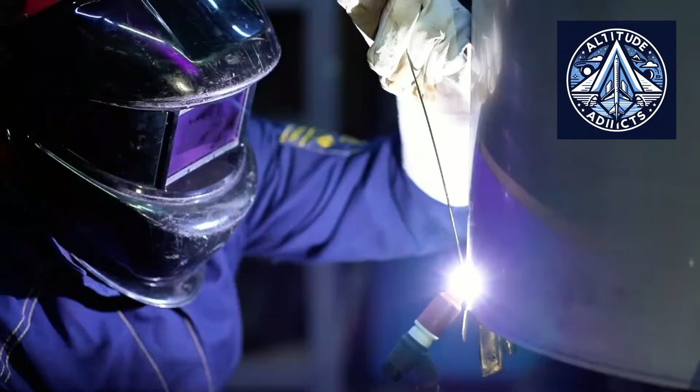What you are looking at is one of the most ambitious civilian maritime initiatives in decades, being prepared by Russia's shipbuilding industry. The United Shipbuilding Corporation, or USC, and the Vimpel Design Bureau have jointly devised the initiative, which is referred to as Platform Number 1.

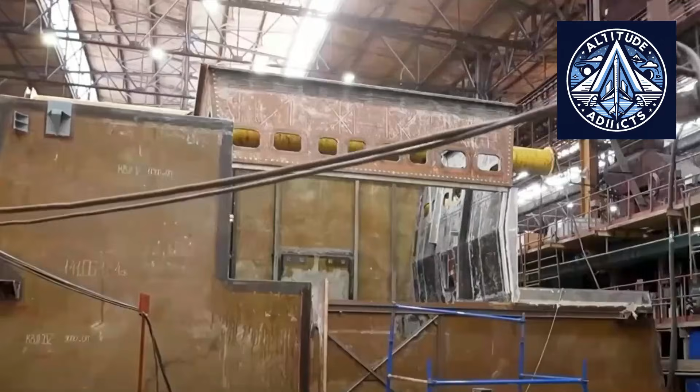The concept introduces a highly standardized platform from which multiple types of commercial ships can be produced using common hull sections, common equipment, and common production procedures, rather than designing and building each vessel as a largely unique project. The objective is to establish an actual serial production model for Russian commercial shipping, a phenomenon that is exceedingly uncommon within modern shipbuilding.

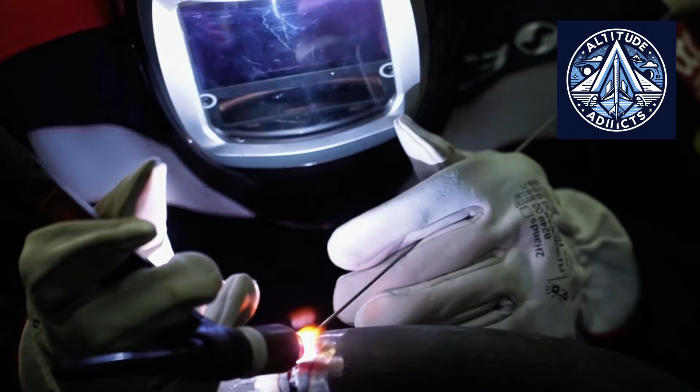And in this video, we're going to dive into how this massive shift works, why it is happening now, and the massive hurdles it faces.

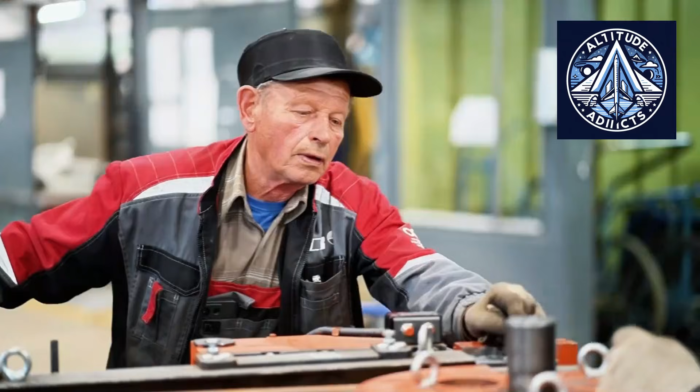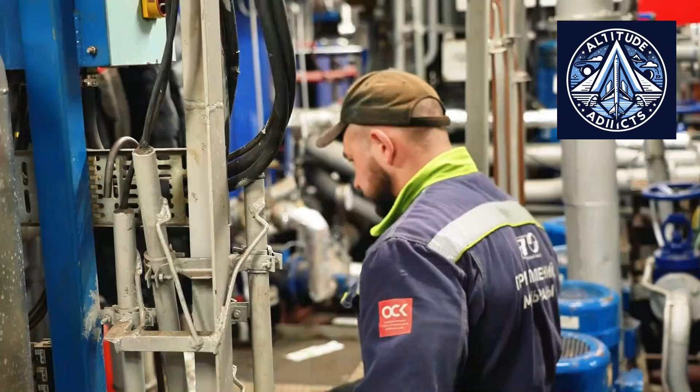This whole program will initially be focused on the Krasnoye Sormovo shipyard in Nizhny Novgorod, which is currently undergoing an extensive upgrade initiative. By 2031, USC intends to build 85 vessels on the platform, while simultaneously increasing the annual production from 6 ships to approximately 20. The initial vessels are anticipated to commence production in the latter part of this decade.

The platform is designed for universal dry cargo ships, container vessels, and tankers that operate in the significant river-sea transport sector of Russia. To understand why this is such a radical shift, we have to look at how shipbuilding has historically been differentiated from the production of automobiles or aircraft.

Many customer-specific modifications are often present on vessels that are of the same class. Machinery configurations, compartments, accommodation areas, and cargo arrangements are usually redesigned by shipyards. This adaptability is advantageous to ship owners. However, it often results in increased expenses and extended construction timelines.

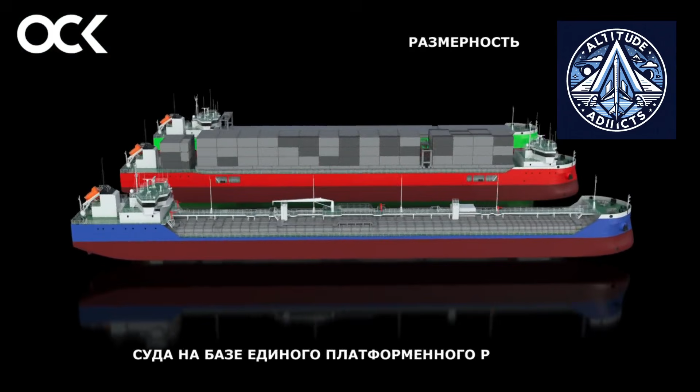Now, let's step back for a second and look at the big picture. Platform Number 1 attempts to challenge this traditional approach by treating ships more like industrial products made from standardized modules. The concept divides each vessel into 6 main hull blocks. Communication systems, bow thrusters, and anchoring equipment are pre-installed in the bow section of all ship types.

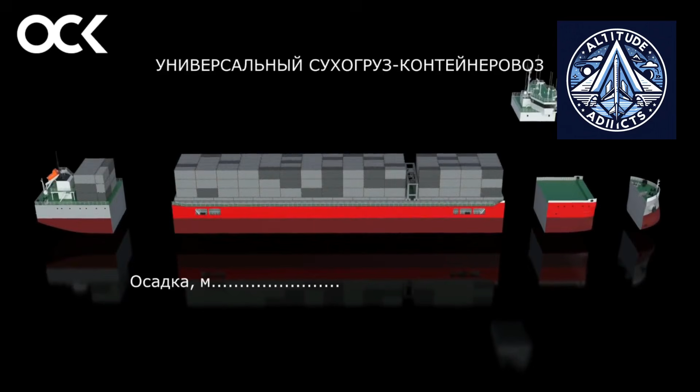The bow is connected to the main superstructure by a transition block, which is customized to suit the vessel's classification as a tanker, dry cargo carrier, or container ship. The stern section is extensively standardized, while the cargo zone itself is configurable to meet the needs of the customer. The accommodation superstructure, bridge, and service spaces are also consistent throughout the entire family of vessels.

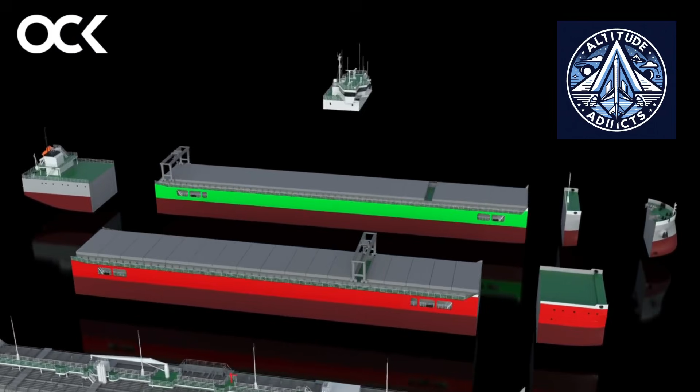In practice, this implies that shipbuilders can produce considerable segments of various vessel types using identical production methods and components before customizing only a limited portion of the ship for specific cargo missions. The outcome is not a singular ship design, but rather a shared architecture that can be used to create multiple types of vessels.

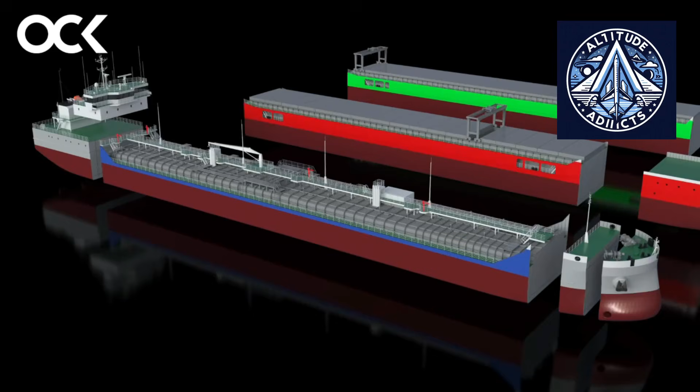This brings us to a critical question that our team at Altitude Addicts has been tracking closely, which is exactly why Russia is pursuing this strategy right now, given that the initiative's timing is not coincidental. The replacement of an aging commercial fleet is becoming an increasingly difficult task for Russia. The economic service lifetimes of hundreds of cargo vessels that operate on inland waterways and river-sea routes are rapidly approaching their end. Many were built decades ago and will necessitate replacement in the years ahead.

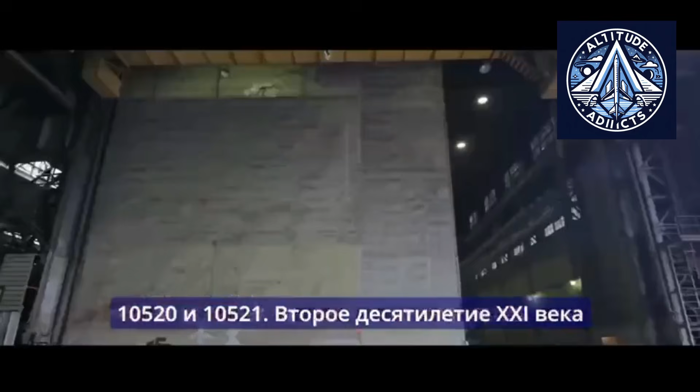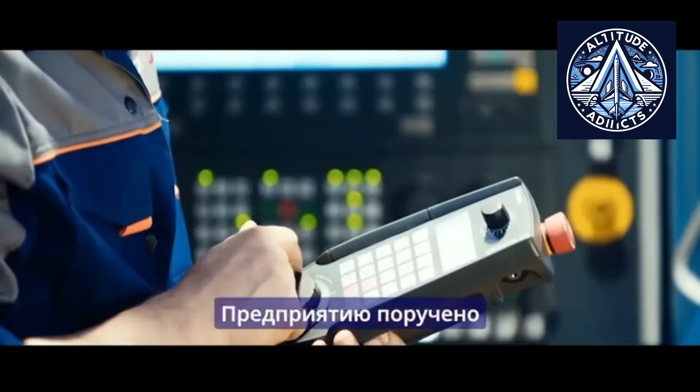Think about it this way. It would be challenging, costly, and time-consuming to replace a large percentage of vessels using conventional shipbuilding techniques. A potential resolution is provided by standardization. Russia aims to create a production system that enables faster ship delivery by consolidating suppliers, simplifying maintenance logistics, and reducing unique parts. It is anticipated that the platform approach will greatly decrease the number of unique components required for each vessel, thereby reducing construction times.

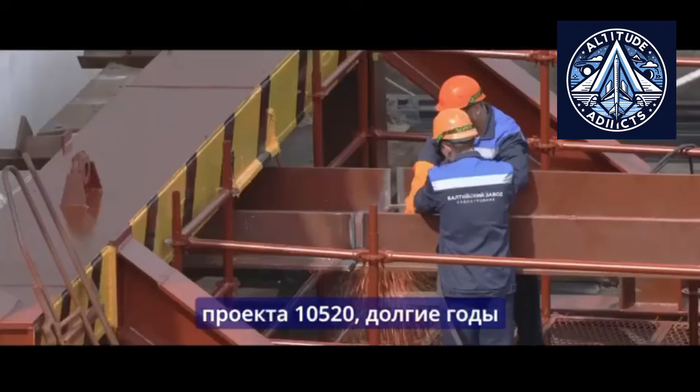This would render shipbuilding more predictable and potentially more cost-effective for operators seeking to modernize their fleets. The initiative is also consistent with the overarching industrial policy objectives of Russia, which include the establishment of stable domestic supply chains and the substitution of imports.

But the real magic happens when we look at how they are standardizing entire systems, going way beyond hull sections, because Platform Number 1 is distinguished by its extensive standardization, which extends far beyond the hull. USC intends to implement uniform propulsion and steering systems for all vessel classes.

Auxiliary diesel generators will also be standardized, with the main difference being in their quantity rather than their design. The majority of the vessel's equipment, onboard systems, and accommodation configurations will adhere to standard specifications.

Let's take a quick breather from all the heavy engineering talk here.

Basically, they want to stop reinventing the wheel every time they build a deck cabin. This method has the potential to generate significant economies of scale. Simplified spare part inventories would be advantageous for ship operators. Maintenance personnel would necessitate instruction on a reduced number of systems.

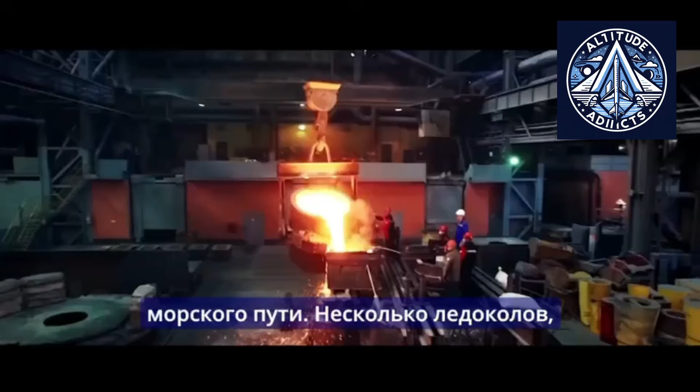Suppliers would benefit from more predictable and extensive production cycles. Rather than adapting to new configurations for each order, shipyards would accumulate experience by repeatedly installing identical equipment bundles. The concept is reminiscent of effective manufacturing practices that have historically led to significant productivity improvements in other industries where standardization has been implemented. This whole setup naturally makes you wonder how it differs from the rest of the world.

At first, modular construction may not appear to be a revolutionary concept. For an extended period, significant shipbuilders in South Korea, China, and Japan have depended on the assembly of large pre-outfitted sections in dry docks. Nevertheless, Russia's strategy is significantly different.

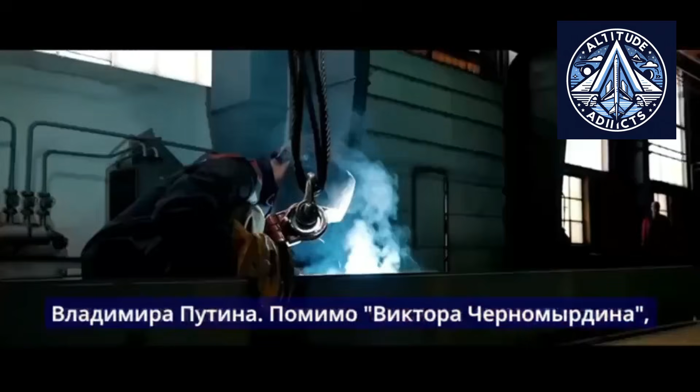The majority of the world's most prominent shipbuilders adhere to standardized production methods, although they keep building vessels with highly specialized designs. Although a Korean shipyard may employ modular construction techniques for LNG carriers, container ships, and tankers, each vessel class remains essentially distinct. Platform number one aims to establish a shared industrial platform that encompasses numerous vessel categories.

To get a clearer picture, the automotive industry may be the most comparable sector for international comparisons. Sedans, SUVs, and crossovers are often built on the same fundamental platform by modern automobile manufacturers. Manufacturers capitalize on shared chassis components, electrical architectures, and production systems, although customers observe distinct vehicles. USC is endeavoring to implement a comparable approach to commercial shipbuilding.

Although modular assembly and digital design tools are becoming more prevalent in shipyards worldwide, there have been few attempts to establish a unified platform that encompasses dry cargo ships, tankers, and container vessels that operate under the same production architecture. This renders the Russian initiative relatively uncommon on a global scale.

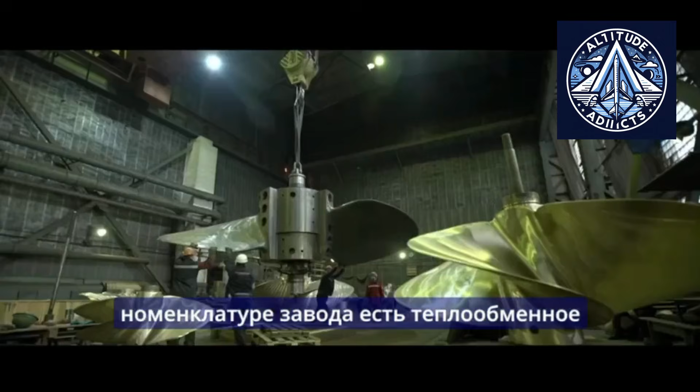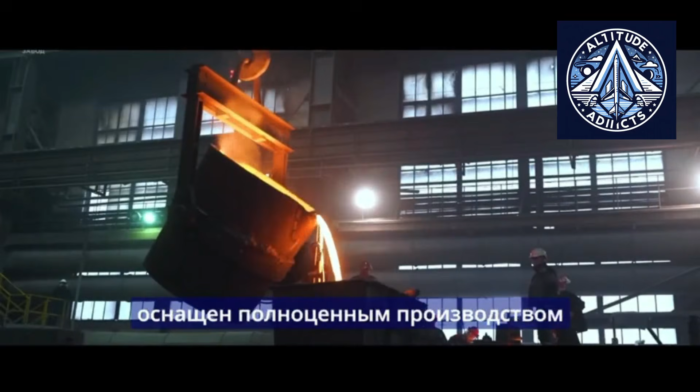Looking closer at these insights from automotive manufacturing, modern car manufacturers have demonstrated the power of platform-based production, which is why the automotive comparison is particularly pertinent. Volkswagen, Toyota, and Hyundai, among others, regularly manufacture numerous vehicle models that are based on shared engineering principles. This method enables manufacturers to more rapidly respond to market demand, reduces development costs, and shortens production cycles. The shipbuilding sector in Russia aspires to attain comparable advantages.

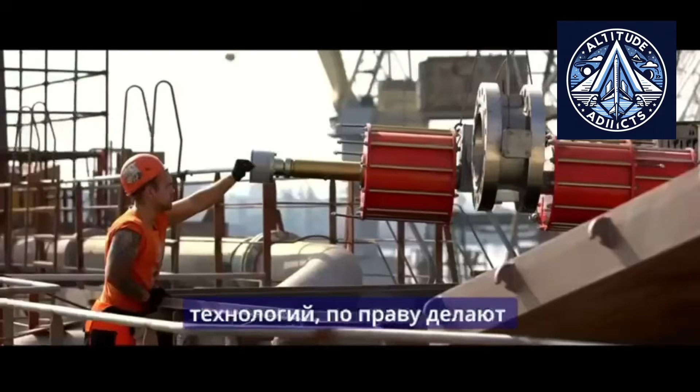If effective, the shipyard could manufacture a tanker, a dry cargo vessel, and a container ship by utilizing a significant number of the same components, production facilities, and supplier networks. A system of this nature would be considerably more efficient than the design and construction of each vessel type as a separate undertaking. Nevertheless, the obstacle is that ships are significantly larger and more customized than automobiles. Consequently, the necessity of accommodating various operational requirements must be reconciled with the advantages of standardization.

All of this grand strategy brings us straight to Krasnoye Sormovo's transformation, because the modernization of the Krasnoye Sormovo shipyard is a critical factor in the success of platform number one. Russia's oldest shipbuilding facility, the historic yard, is currently enduring a significant transformation to facilitate serial production.

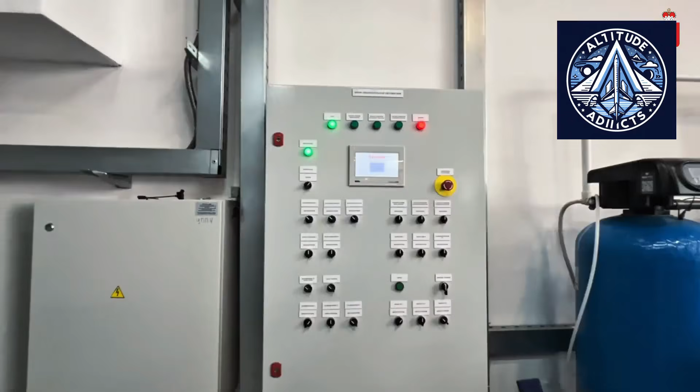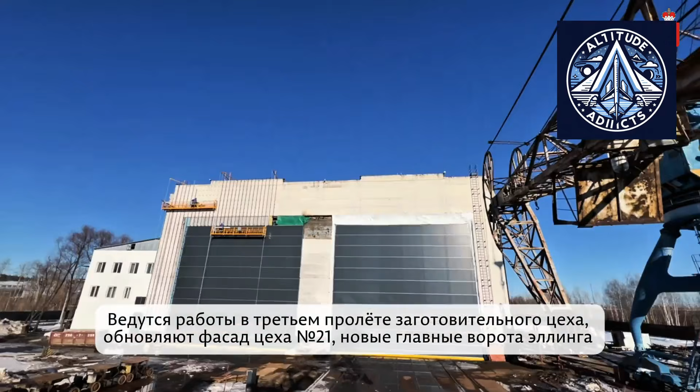Laser cutting systems are replacing antiquated thermal cutting equipment. Robotic welding lines and automated profile cutting devices are currently being implemented. Production management and planning will be digitized through the implementation of new software systems. The yard is also in the process of constructing combined cleaning and painting facilities, procuring self-propelled section transporters, and upgrading the outfitting of quays. The goal is evident: transition from conventional craft-oriented shipbuilding to a production line model.

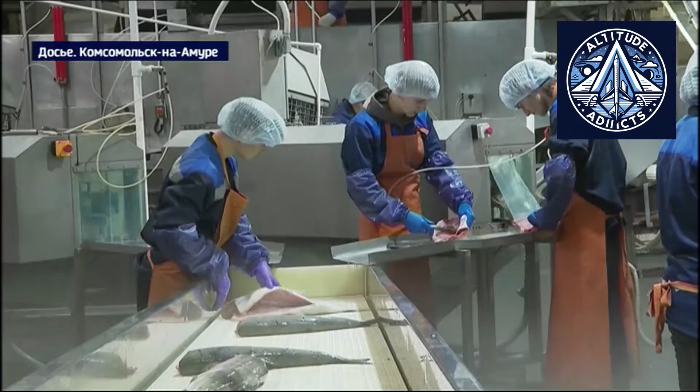The construction time from the beginning of fabrication to launch could be reduced by over 50% if the project is successful. The Russian commercial shipbuilding sector would experience a substantial increase in productivity, as its annual output would more than triple. So updates like this show how the yard is completely changing how it operates.

And it is a point we emphasize often at Altitude Addicts. This transformation is not solely about the acquisition of new machinery. Additionally, it necessitates modifications to supplier coordination, production planning, logistics management, and workforce organization.

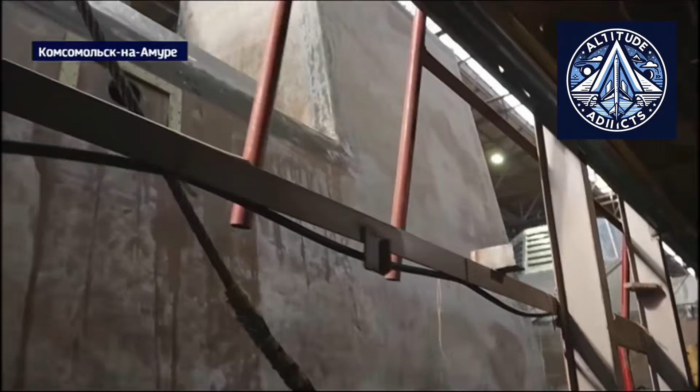The ultimate objective is to create a manufacturing environment in which ships traverse the yard in a consistent and predictable manner. At the same time, we have to consider the environmental factors involved, as another critical component of the activity is its adherence to contemporary environmental regulations. The platform has been developed to satisfy the current standards for emissions reduction and energy efficiency.

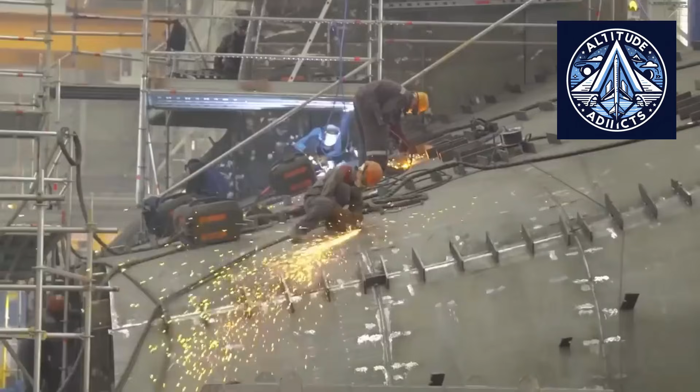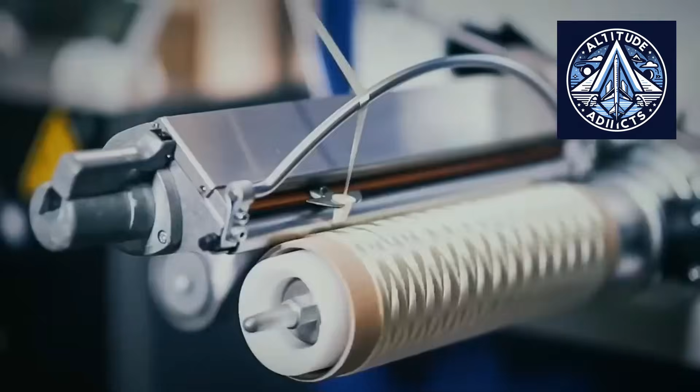Designers have endeavored to enhance fuel efficiency while simultaneously preserving the operational capabilities necessary for Russia's extensive river and coastal transportation network. This is of growing significance due to the fact that environmental performance has become a critical factor in commercial shipping on a global scale. Even operators that operate predominantly on domestic routes must anticipate increased fuel costs and more stringent efficiency standards.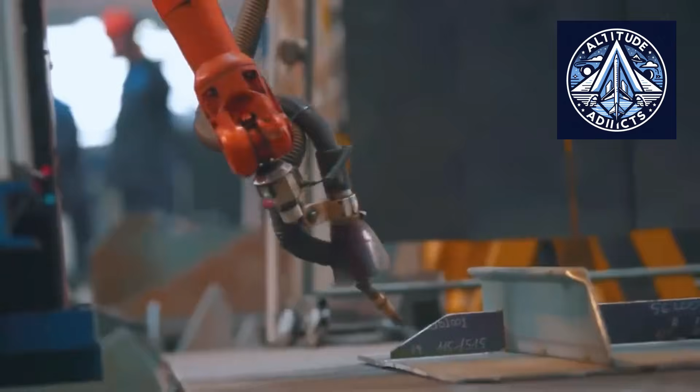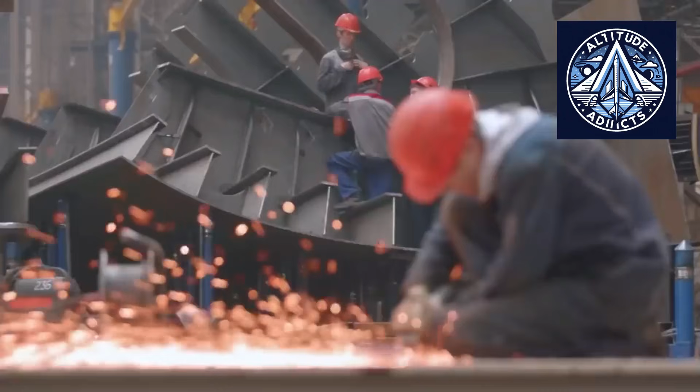USC tries to prevent the necessity for costly redesigns at a later stage in the vessel's service lives by integrating these standards from the outset. The standardized approach may also facilitate future upgrades by enabling operators to introduce new technologies across an entire fleet rather than modifying each ship individually.

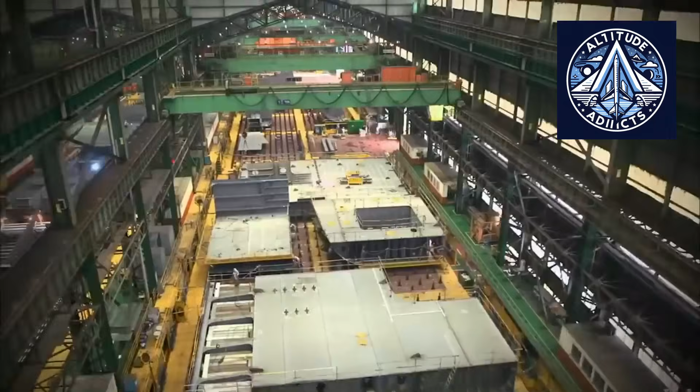Of course, no project of this scale is without its possible obstacles, and the initiative is confronted with sizable obstacles despite its potential. Automobile manufacturing is intrinsically less intricate than shipbuilding. Requirements for cargo are subject to significant variation among customers, regulatory standards are subject to change, and transportation markets can fluctuate rapidly. The platform approach must ensure a balance between using standardized components and allowing for customization. An excessive amount of standardization may restrict its commercial appeal. The program's efficiency advantages may be undermined if the amount is insufficient.

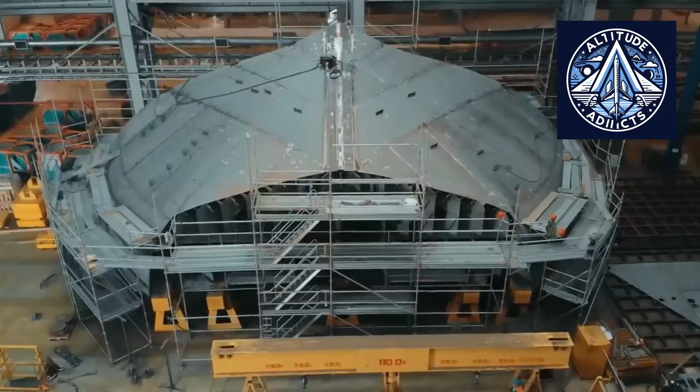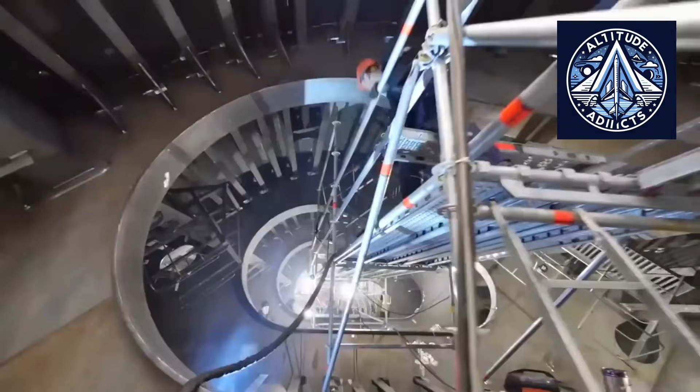The reliability of the supply chain will also be crucial. The strategy is contingent upon the establishment of a dependable network of suppliers that can consistently provide standardized components at a large scale. Additionally, the modernization of Krasnoye Sormovo must be conducted in accordance with the established timeline. The production model's implementation may be impeded by delays in infrastructure enhancements or workforce training.

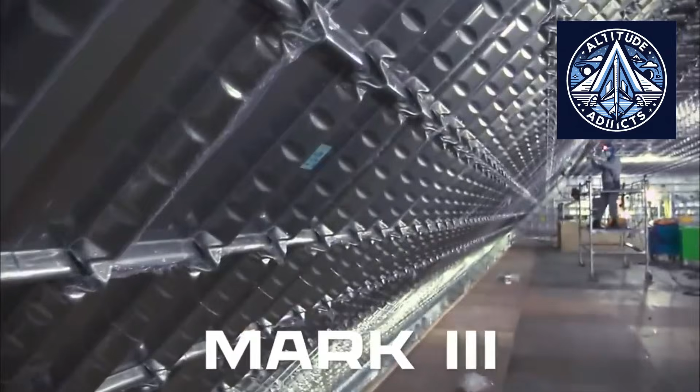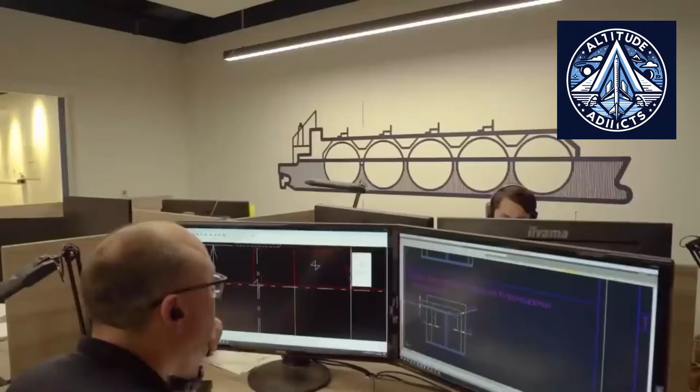Another obstacle is the preservation of competitiveness. International shipbuilders, particularly those in East Asia, maintain their dominance in the commercial ship construction industry by means of their highly efficient industrial systems and extensive production volumes. Russia's platform approach must demonstrate its ability to effectively compete in terms of cost, quality, and delivery schedules.

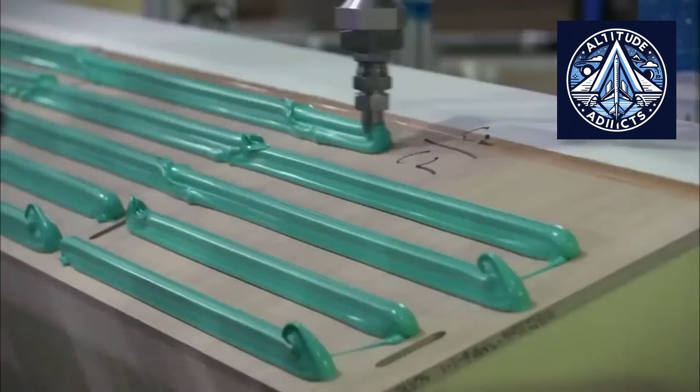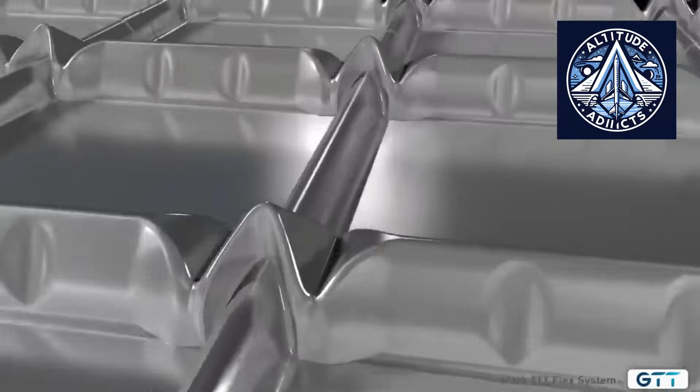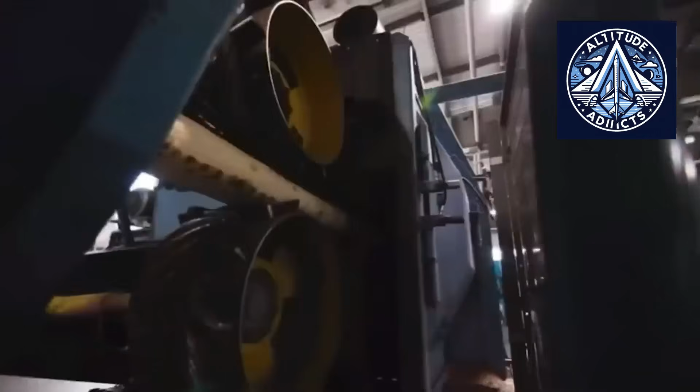When you look at the sheer scale of what they are trying to pull off, it represents a clear return to long-term industrial planning. And the most notable feature of Platform Number 1 is its resemblance to the industrial planning of the Soviet Union. The project's timeline, which spans from 2026 to 2031, is essentially a contemporary 5-year industrial program. Russia's commercial fleet is to be perpetually renewed through the establishment of a comprehensive production ecosystem, rather than solely building ships. Platform Number 1 aims to build industrial capacity and replace the fleet over the long term, rather than focusing on individual vessel contracts like many modern shipbuilding initiatives.

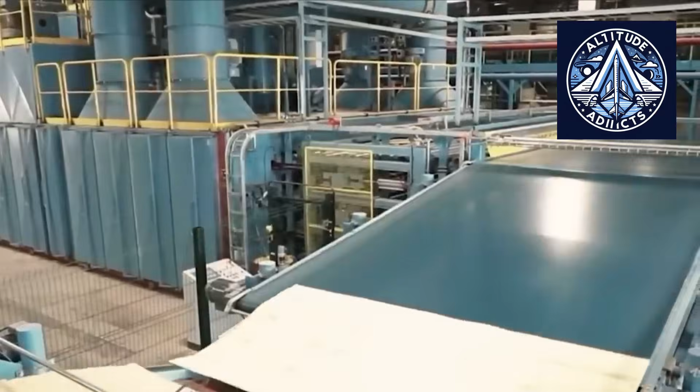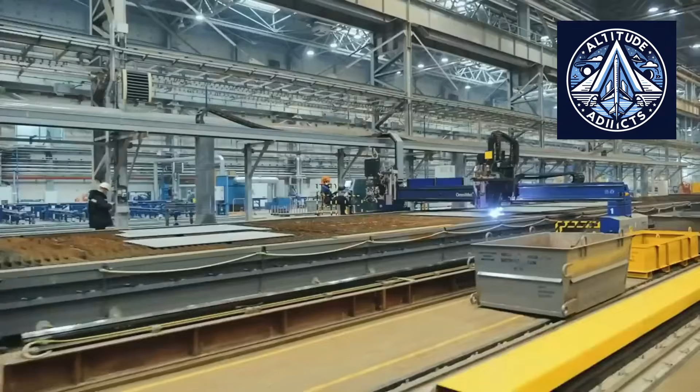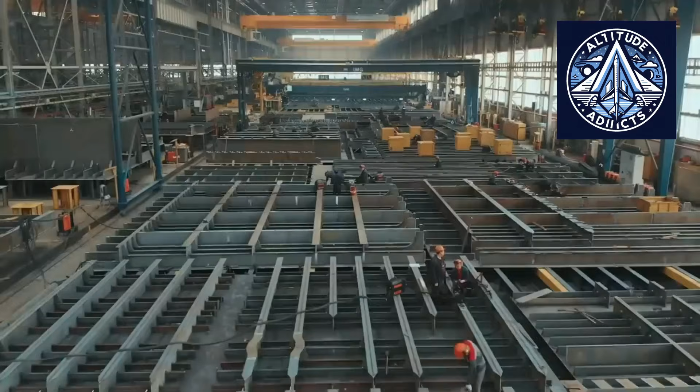Many of the principles that once typified large-scale Soviet industrial programs are evoked by the emphasis on standardization, serial production, and integrated supply chains. Nevertheless, the new initiative integrates these concepts with contemporary environmental standards, digital engineering tools, robotic manufacturing systems, and modern automation. Whether this massive gamble pays off is something we will be watching closely here at Altitude Addicts. It remains to be determined whether it will be successful.

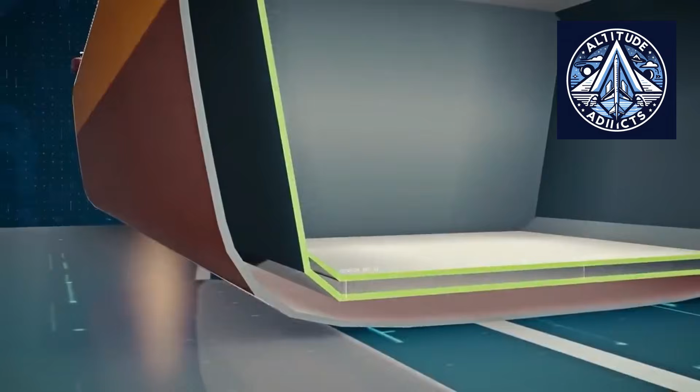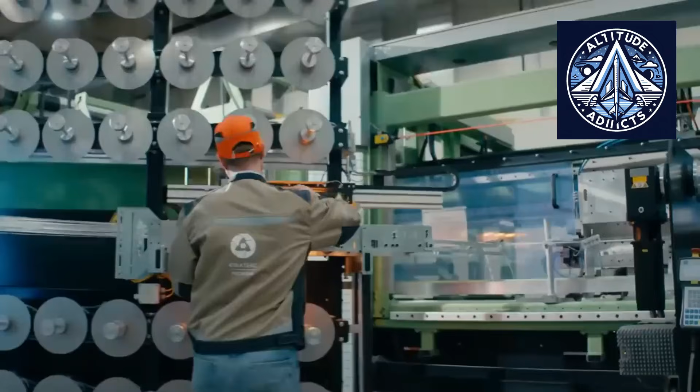However, the initiative is one of the most comprehensive endeavors in recent years to apply mass production principles to commercial shipbuilding. If USC succeeds, Russia could create a standardized approach to river-sea vessel construction, differing significantly from the current project-by-project model in much of the global shipbuilding industry. Platform Number 1 may become one of the most closely observed commercial shipbuilding experiments of the decade, in a sector that is confronted with aging fleets, supply chain pressures, labor shortages, and increasing environmental demands.

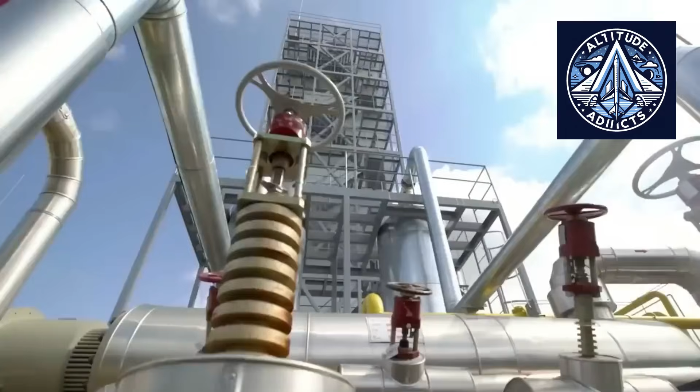The initiative aims to revolutionize the design, manufacturing, maintenance, and modernization of ships throughout their entire operational lifecycle, in addition to the vessels themselves. It has the potential to initiate a new era in Russian commercial shipbuilding and serve as a model for future industrial initiatives in other sectors of the economy, if it is successful.